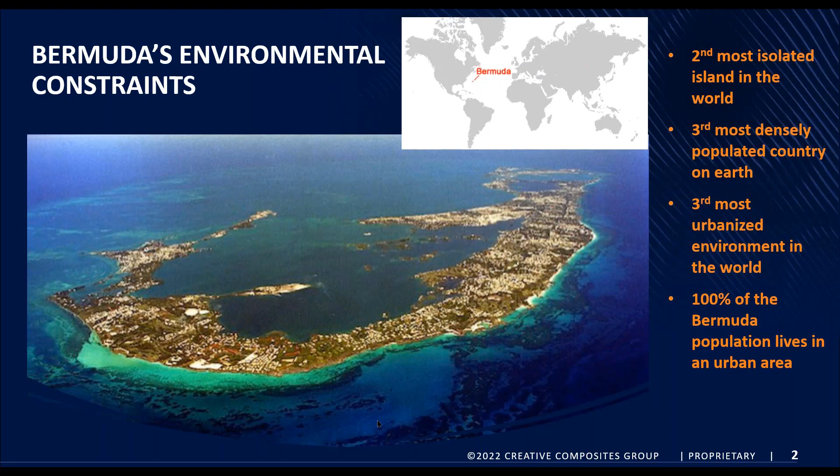We're also incredibly densely populated. We have about 60,000 people on our small island. And as a result, it's a very urban place. We're classified as almost 100% urban. We're living right on top of each other. Because we're so constrained by space, national parks are very important here, and our biggest national park and our longest linear park is an old railway trail.

We had a train that ran here for about 17 years, and the trail has been preserved into modern day. So back in 2012, I had come back to Bermuda from my university, and I decided to set up a charity called the Friends of Bermuda Railway Trail to attempt to enhance and reconnect this national park and turn it into a continuous route for pedestrians and cyclists.

But this project is associated with many challenges. In particular, we're one of the saltiest marine environments in the world. We're also hurricane prone, and the original rail line had 33 bridges and trestles. So we knew that anything we did to reconnect it would have to meet our tough environmental circumstances and be able to withstand hurricane force winds.

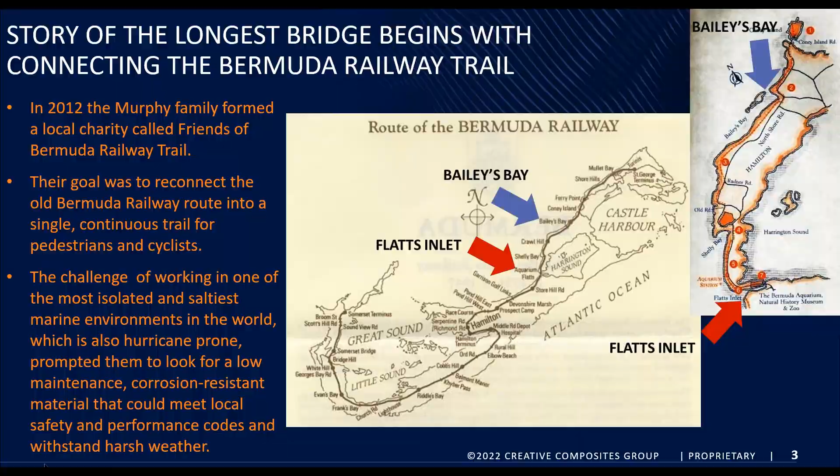And we talked to, at the time, a fellow called Eric Johansen, who was the founder of Techtonics and the lead engineer. And he introduced us to these fiberglass bridges, which had many advantages for us for this project. The pylons were pre-existing, and the bridges could be shipped in containers and assembled off-site in a location called Dockyard, and then barged into place. They were assembled by volunteers, myself included, and Parks Department employees.

So we constructed these bridges, and we found that we had great success in terms of trail use. The average trail use per week increased about tenfold, and it exposed locals and tourists alike to one of our greatest assets, which, aside from the friendly people, I'd say is the turquoise sea. That's really one of the highlights of our environment here.

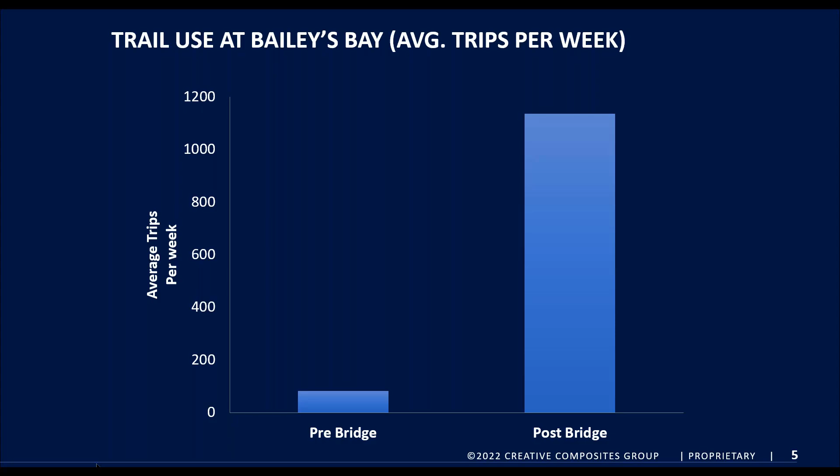But it didn't last very long. Our railway age came late and was kind of short-lived. It was finished in 1931 and only lasted until 1948. And part of the issue was that our harsh natural environment led to many maintenance problems. The towers which the trestles are built upon were made out of wood. They rotted quite quickly. I've been told that the ends weren't soaked in creosote, so that was a big problem.

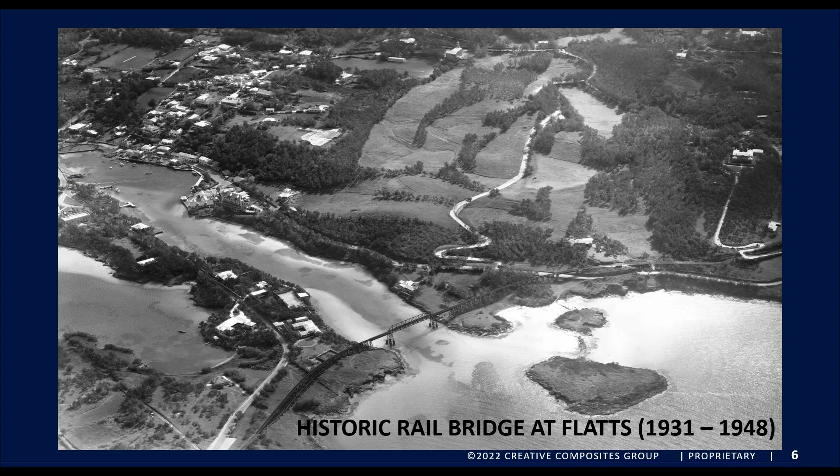And then also the tracks and the truss on top were constructed out of metal. They corroded and deteriorated very, very quickly until a point was reached where it wasn't worth the cost to try and continue the railway train, and it was reverted back to a national park.

Over to you, Dan. All right, thanks, Tucker, and that's a great introduction to this project. So we were tapped to do this. Sorry, I'll go back a slide.

Creative Composites Group, which Creative Pultrusions is part of, has the ET Techtonics product line, in which Eric Johansen, we call him Rick. Even in this project, Rick Johansen had oversight of the design with me of Creative Composites Group.

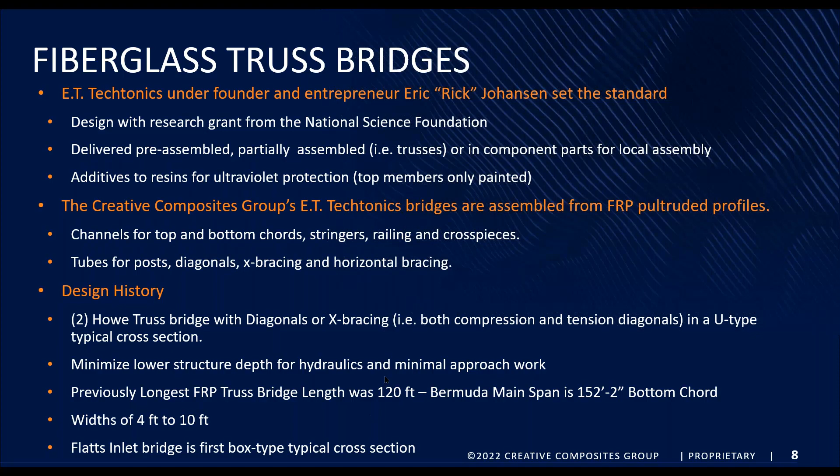As far as design and testing of the main span bridge, we designed this according to the Bermuda Building Code, which references the 2015 International Building Code, and ASCE 7-10, which is minimum loads for structures. And of course, this structure would be an other type of structure. We utilize the allowable stress design method.

This method is utilized mainly because AASHTO and the building code have not come out with LRFD phi factors or parameters for pultruded members. We are expecting the building code to publish these phi factors for LRFD design very soon.

So this project, a concern, and Bailey's Bay, all those bridges that you saw in the previous project, have withstood type 4 and type 5 hurricane winds. So the hurricane wind load was considered to be 158 miles per hour. That's our velocity, and the building code modifies that load by a factor for service load of 0.6. So the net design pressure on this structure is 67 pounds per square foot applied to the side of the structure as if enclosed.

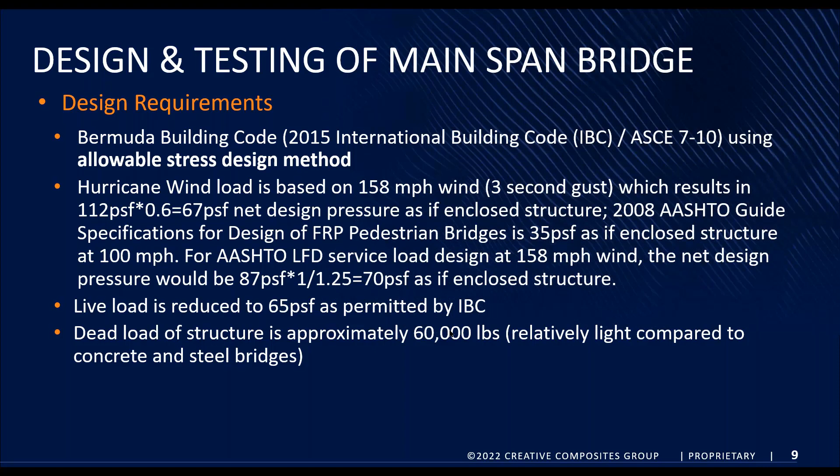The design process of this main span: first, Rick and I modeled the design, a finite element analysis of the box truss structure. And so we came up with some general loading. Then we went to the University of Miami and West Virginia University and had our members tested.

The photo on the side is a test of a 3-foot long tube member, and we're testing its compression capabilities. From that, we developed the Euler buckling graph of our compression members, and we also tested these members in tension, as well as those channels mentioned before.

And then finally, for connection design, many of you are interested in the connection design of these structures. Well, essentially, we don't calculate connection design like you do for a steel bridge. We take our material, set up an apparatus, test it, and validate those connections through bearing tests. And so we do our connection design based on actual tests.

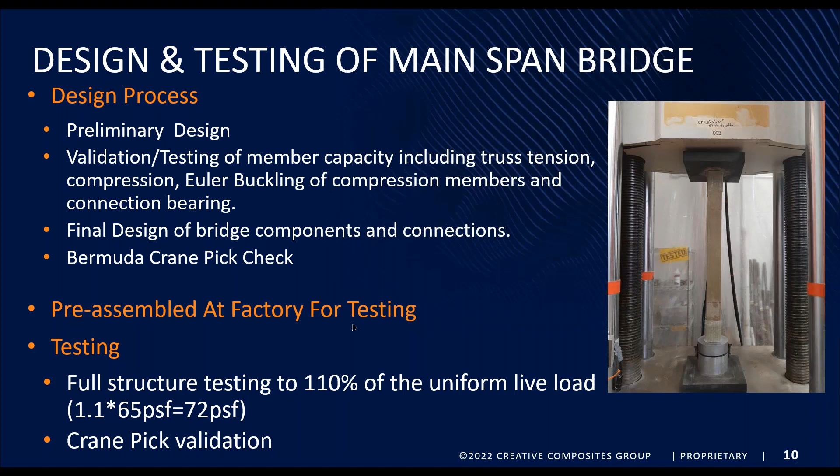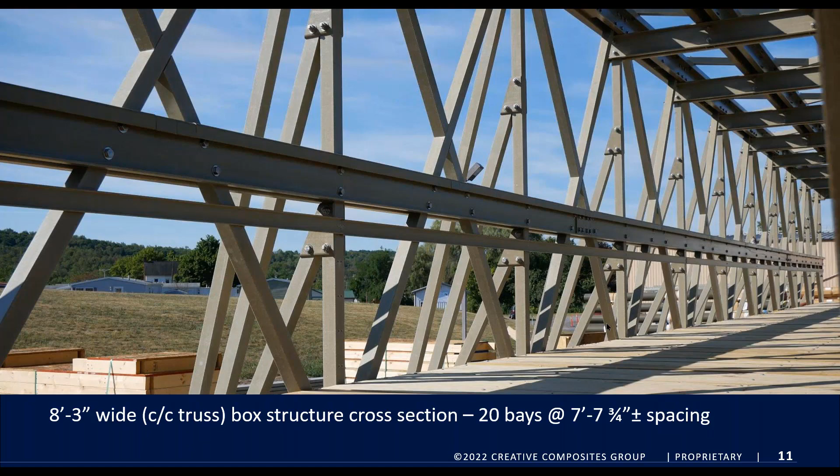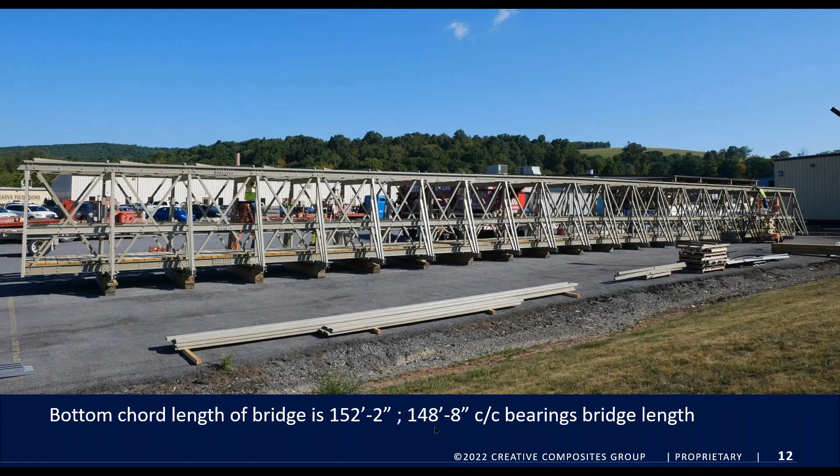There were 20 bays at approximately 7 foot, 7 3/4 inch spacing. As you can see in the yard, the bottom chord length was 152 foot 2 inches. The center line of bearings, and we're going to show you a picture of what the bearings look like here shortly, they were 148 foot 8 inches, center to center bearing bridge length. Some of the facets of design before we get into the construction of it and assembly.

Containers are limited to 40 feet when we are going to ship this bridge. So our maximum member, as you can see here, is 38 foot 3/4 inch. I have the wrong number in the slide there on the text, but that is part of the plans there. 152 foot 2 inch bottom chord shown. We used a 28 3/4 inch diameter A316 stainless steel bolt splice.

All bolts or hardware were A316 designation. The weight of that longest member in the middle, 38 feet, is approximately 226 pounds. So 2 people can take that member and move it into place. The compression members were checked at splice locations with top chord splices controlling the design. We located those splices as far as possible away within those limits of shipping containers.

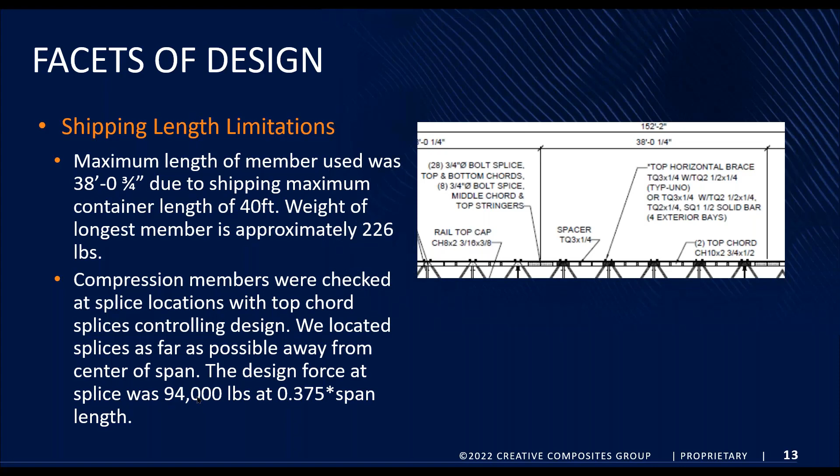Just for a quantitative number, the design force at the splice was 94,000 pounds at about 0.375 times the span length. The allowable value was around 135,000 pounds at this splice location. Another facet of design, because FRP is lightweight, we must check frequencies. The 2008 AASHTO guide specifications for design of FRP pedestrian bridges require vertical frequency of 5 hertz and transverse frequency of 3 hertz minimum for negligible risk of vibrational issues.

Essentially, the vibrational issues can cause troubles. When you have synchronized pedestrian use of a bridge, that synchronized dynamic force can cause vibration, which results in deflection of the structure. And if that is continued, it will accelerate and essentially make the bridge fail.

Actual frequencies, and we mostly model our bridges without decking, knowing that that decking will help with diaphragm action, especially in the lateral or transverse direction, were 2.88 hertz in the vertical direction and 2.587 hertz in the transverse direction of the bridge. That may look a little alarming, so let me explain with the next slide.

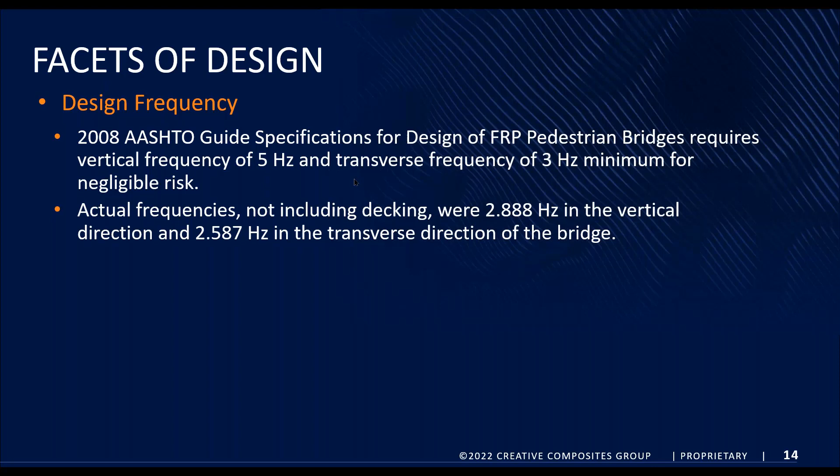As referenced in the current AASHTO pedestrian design specifications, there is a document that's referenced from Europe. In fact, it's part of the France Association of Civil Engineering. It's called the 2006 Setra document, and that's referenced in the last slide also. We looked at this after we designed the bridge, and we went through an analysis as required by that method. Essentially, it looks at acceleration of the bridge during synchronized pedestrian motion.

Now, if you remember, those numbers that I gave you before were based on natural frequency in hertz. So this is a better indicator of what kind of comfort you're going to have. So we went through this, and I'm going to show you this graph a little bit. We looked at it in both directions. So this is part of that Setra document. Again, if it meets the AASHTO requirements, then we are negligible risk.

As you can see here in each direction of the bridge, looking at the acceleration, we ended up with a low risk of vibrational troubles. And then it's categorized as maximum comfort, mean comfort, or minimum comfort. And obviously the red range is look out. That's high risk, okay? So if we looked at this acceleration, which is way below, we're right in here near 0. So we're at maximum comfort level.

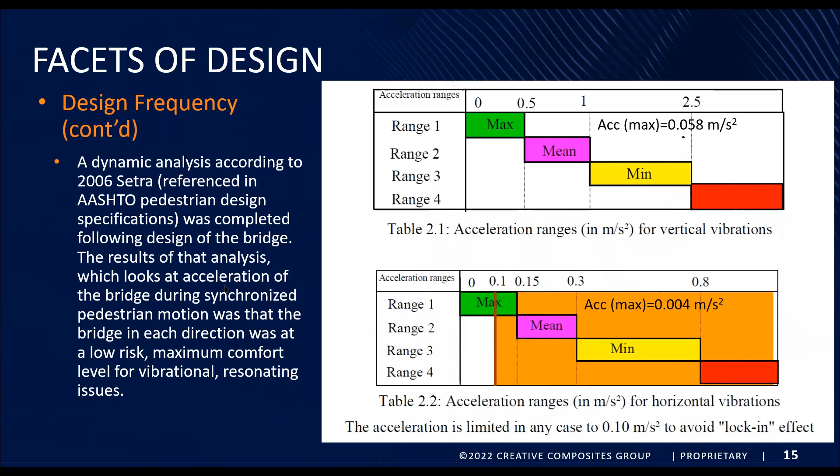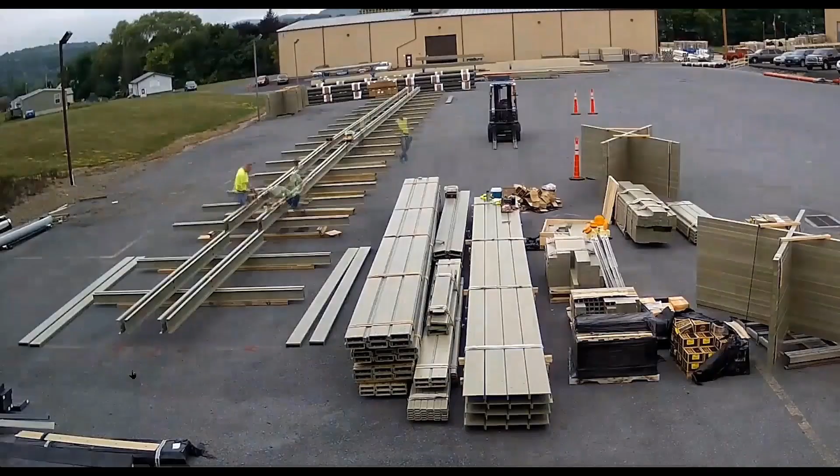Now we're going to show you an assembly. That was some of the facets of design. We'll continue to talk about another facet of design with the assembly and testing. So I just want to show you a video here. We assembled this in our yard. You saw some pictures already. We're going to show here, give you a minute. We're going to assemble it from the bottom to the top. You'll see things under each bay.

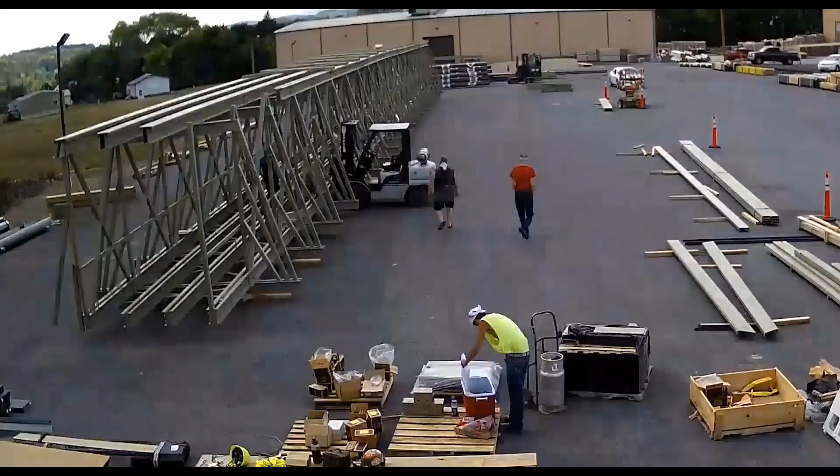We pre-camber our structures upward, just like a pre-stressed concrete bridge is pre-cambered upward with the stress in their pre-stressing strands. We pre-camber our bridges, and we have a technique to do that, a geometrical technique, placing the holes of our cross bracing. Another critical factor, we wanted to match the lift that was going to happen in Bermuda, and we wanted to make sure there were no problems.

Here is our lift, approximately 20 feet in the air, which was the required lift. Our crane is from a local crane company that lifts manufactured homes. Well, this was probably the longest manufactured home they ever lifted. So this was critical logistics. Bermuda was limited by the cranes, as I said before, and as part of the test program, we lifted this bridge and simulated the Bermuda pick in our yard.

There are 8 pick points, and maybe I can show you them quickly. As you can see, there's a line, there's a pick point. If you see blue on the structure, there's a pick point, pick point, pick. This was just a stability point that we added. So really we have 1, 2, 3, 4. So we have 8 pick points, 4 on each side.

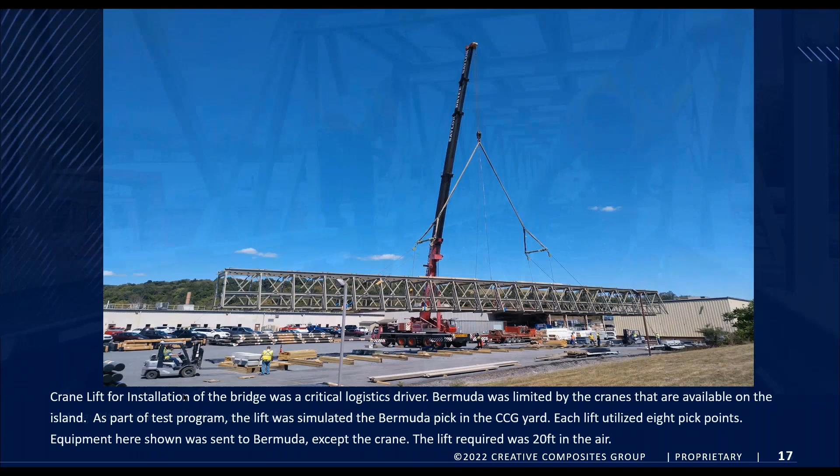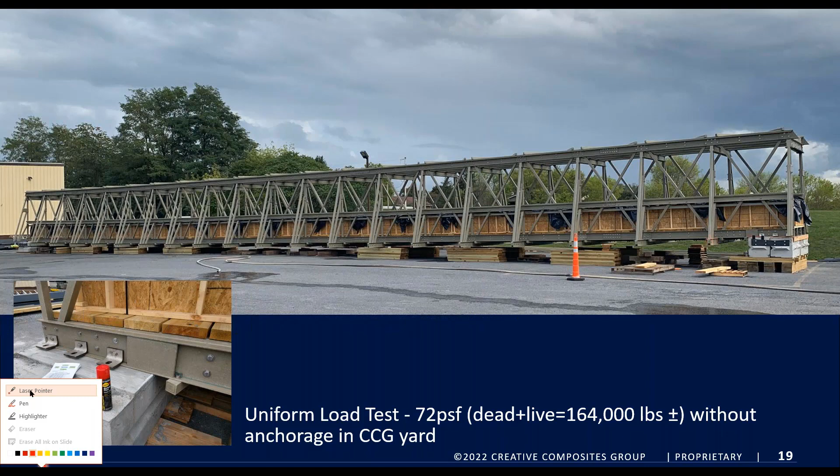We took the deflection. Deflection is a big deal for FRP members because often it controls the design. Not so much in this structure because it's a box structure. The section really helped us. But if you have a U-type structure, deflection will control. And we want our model to correlate with the deflections that we had.

So we measured deflections. We found about 5 inches. The model showed around 7 inches total with dead and live load. But we believe that to be okay because our model does not consider the rigidity of the decking. So this 5 inches, which was a little lower than 7 inches, we were quite pleased with that when we did the testing of the dead plus live.

Moving on to installation. The bridge was disassembled. It was kitted or packaged up and shipped to Bermuda in containers. Tucker, who is going to continue, reassembled the job. We couldn't go to Bermuda because of the pandemic. We were not allowed to be on the island. It was closed. And so we shipped the bridge to Bermuda for Tucker to assemble and install.

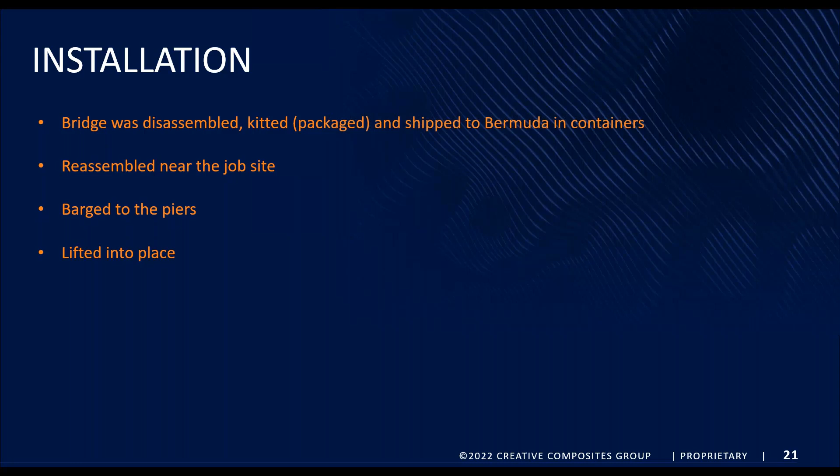He then assembled it, which you will see. He barged it to the piers and then lifted it into place. Tucker? Thank you, Dan. That was a very informative piece on the design and some of the technical issues of the bridge. I'm just going to talk a little bit about putting the bridge together on site and how we got it to our final location.

And as Dan mentioned, I had the good fortune to build this bridge twice and disassemble it once. So I traveled to Pennsylvania during the height of the pandemic in August of 2020, and then I came back and the bridges arrived in October 2020. They were shipped in 3 containers, and our staging location was at the western end of Bermuda, a place called Dockyard, which was home to America's Cup in 2017.

And it was really an ideal area for us in many ways because it's pretty wide open, an easy area to work. One of the challenges was we had to be near enough to the water to have the barge pull up and be able to pick the bridge, which left us quite exposed to the conditions. So any storm that came through, we really felt. But the bridge, once it arrived in Bermuda, was constructed entirely by a team of volunteers, and we had one telehandler, or a forklift could also work.

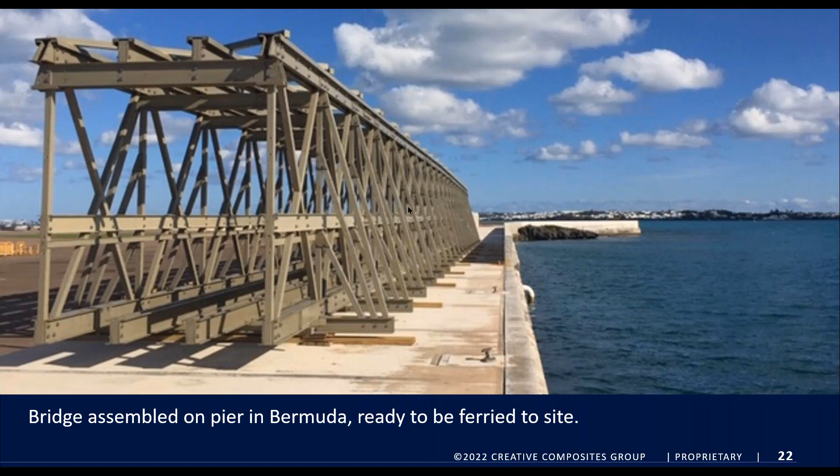The volunteers were an eclectic group of people. It was a mix of young and old, women and men. I think our oldest volunteer was 80 years old. And we even had a fellow who had been stranded in Bermuda on his boat during the pandemic in Dockyard, and he had nothing to do, so he just came out and helped us put the bridge together. So almost anyone can do it. And as Dan mentioned, it's very lightweight, so it only took 2 or 3 people to carry each piece of the bridge. Once we assembled it, we picked it up, put it on this barge.

As you can see, the barge, that was probably the most stressful part. I think we were pressed by time to get everything done in time to get it on the barge. And we were fortunate that we had done the lift before in Pennsylvania. We knew exactly what the equipment was. The only factor we couldn't control is we hadn't put it on a barge before, and that was the most stressful thing, I think, watching the bridge leave the dock on the barge.

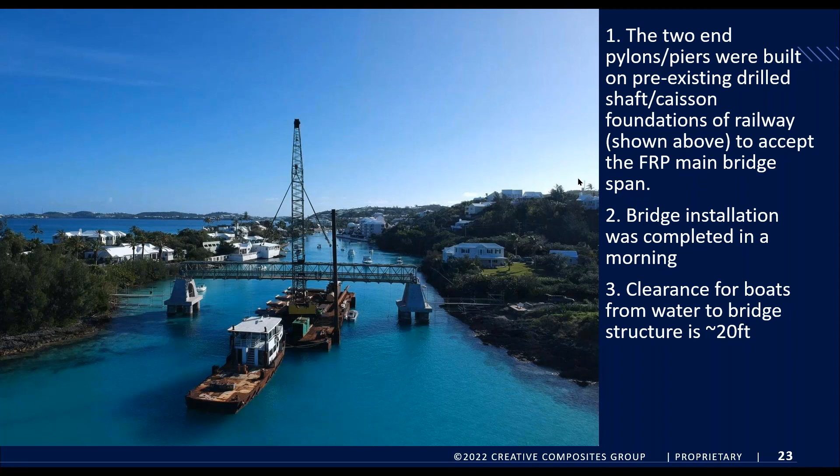You just hope that it would not be lost at sea and become a bridge for fishes instead of people. But we had a calm day, so everything arrived okay on site. And the installation went very smoothly. Our anchor bolts aligned perfectly, and the installation itself actually only took a morning. And here you can see the bridge in place. It's got about a 20-foot clearance for boats underneath.

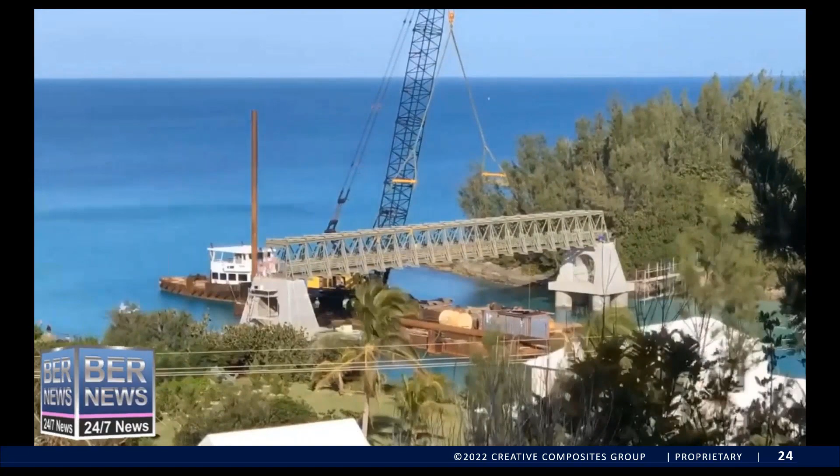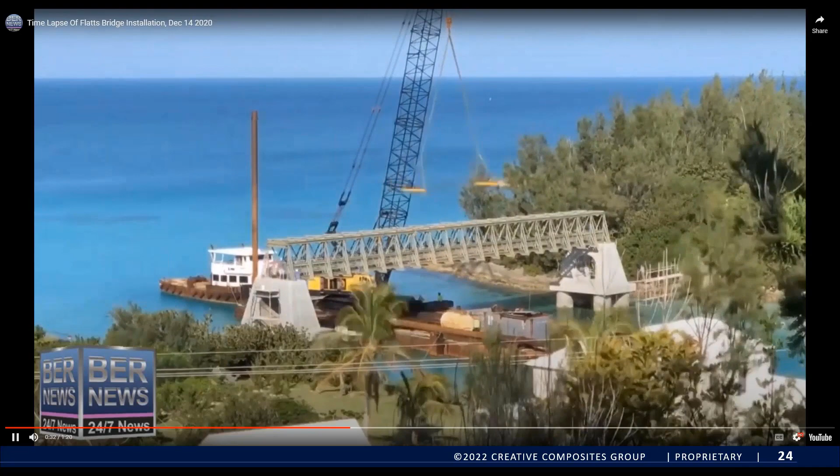So here's just a short video of the installation. Dan's going to start it. It's sped up slightly, but it really is quick. So we just lined the barge up, anchored it. On the pylons, we had the contractor who built the pylons, and then the barge was obviously contracted out as well. Yeah, Tucker, that was installed, as the video says, on December 14th, 2020. Yep.

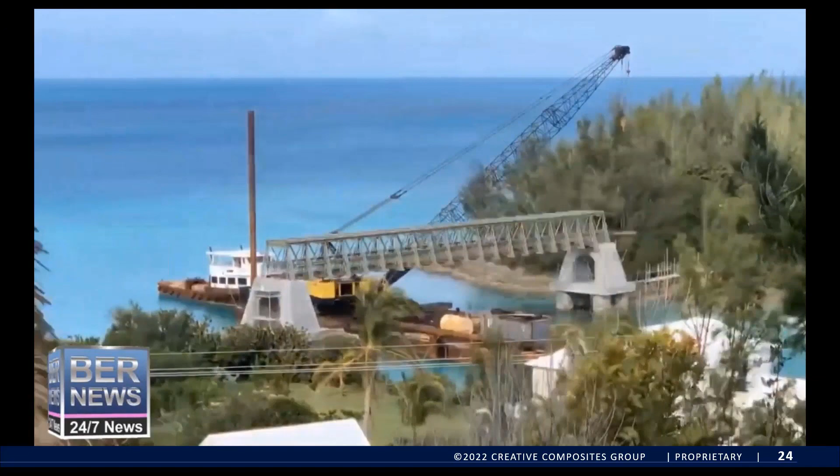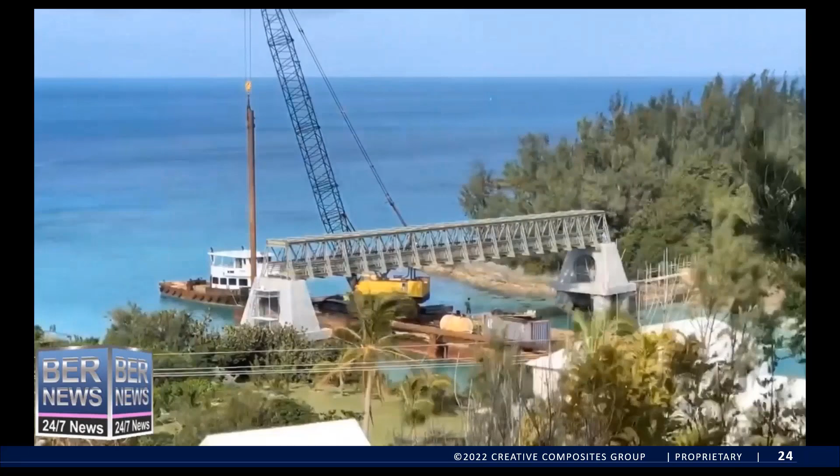And it was a big event in Bermuda; the local news station, this is where the video is coming from, they were there to capture it. So we were fortunate that everything went smoothly. And actually, we also had a video link with Creative Pultrusions. They could not be there at the time because of the pandemic; restrictions were quite severe at the time. So they were watching remotely and guiding us on any questions we had.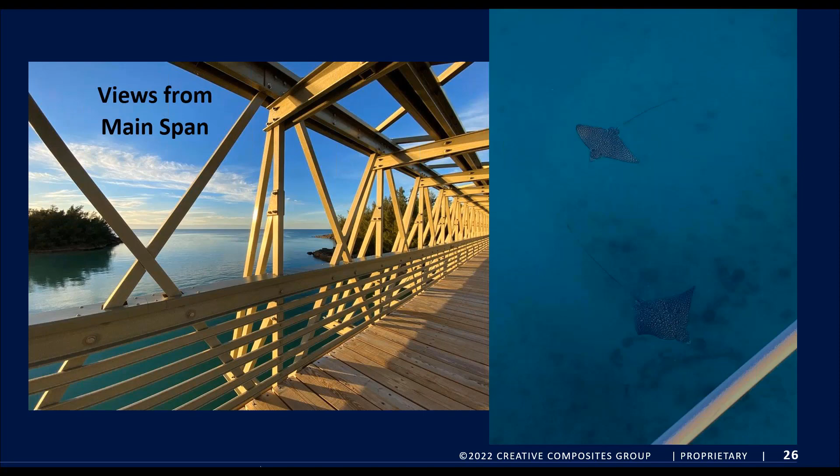I just wanted to go over a little bit of the lessons learned. Again, we assembled it in our yard and it wasn't level. We used these concrete barriers that have pointed edges on them, as you can see. And when we started doing the test, one of the corners, the knife of that barrier, started coming into our material. And because of the higher stresses there at that point, it started propagating a crack in our bottom chord.

So we went back and decided to firm that up, as you can see here, and we firmed that area up. The design numbers were okay in this area. It's just that localized hinge point, or a jackknifing point, you might say, caused some troubles. And so we decided to reinforce that a little better and take care of that problem. And the testing that you saw earlier, the photos before, had that in effect. So we took care of all that.

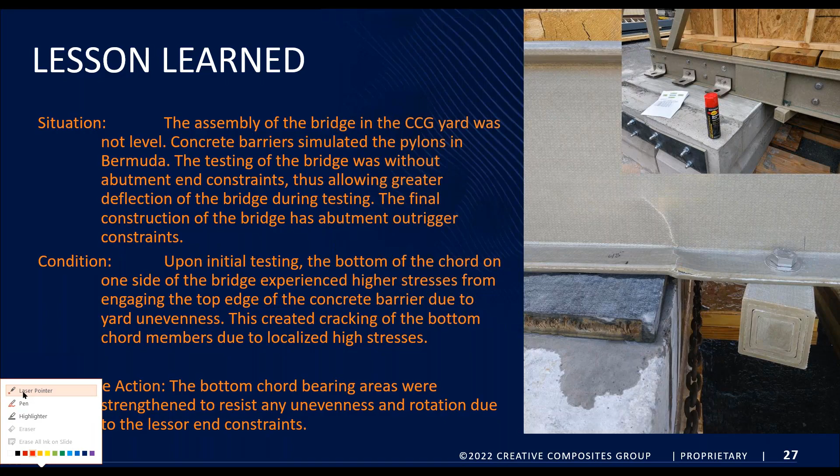All right, Dan and Tucker, thanks a lot. Very interesting presentation. In fact, very interesting concept for a very lightweight bridge. So at this point, we're gonna turn it to Paul Lyles, who's gonna be moderating the question and answer. Paul? Okay, thank you. And Tucker and Dan, real good job.

Okay, we had some questions that came in beforehand, and we've got some more that have come in during the presentation. We'll probably get some more during the question and answers. But I've broken the questions down into design questions, construction questions, maybe a couple maintenance questions, and some cost questions. And with that, we'll go ahead and get underway. The first one, design questions. Could you discuss climate change and resiliency in respect to the project?

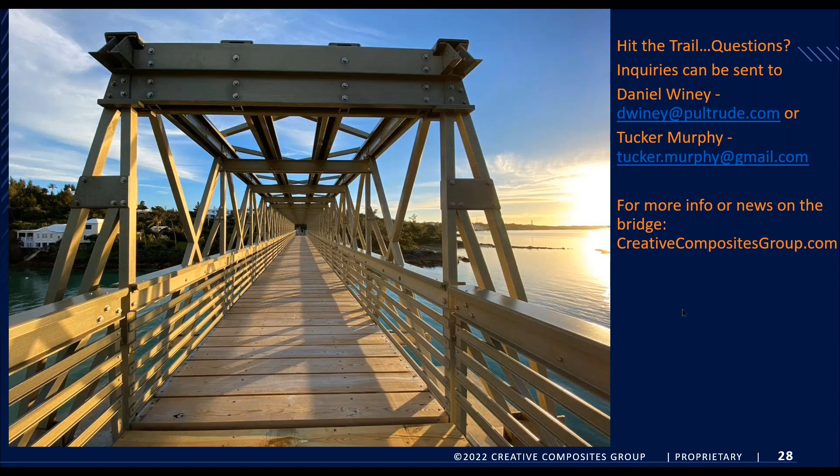Yeah, you do take their equations, whether the cosine or the sine, and you incorporate that in. So whoever asked that question could maybe get further clarification. But yeah, you can do that. That's in that document, how you calculate that.

Okay. What is the thermal coefficient of expansion for FRP compared to steel or concrete? It's less. Very similar to concrete, definitely less than steel. And it's in our manual. So if you go to the Pultex manual under the references, you can see it in there for our members, channels and whatnot. Okay, thank you. Next question, was uplift a concern in the design of the connections for the bridge?

Yes, we sent all that data to the engineer in Bermuda. So we coordinated all that and gave them reactions. Okay, thank you. Next question, what collision protection have you provided? Not really any, besides what was structural to the project. Yeah, in terms of the inlet itself, there's not really any. There are not really any boats. It's not like the Intracoastal Waterway or something which goes somewhere. It's mainly small center console watercraft that go under the bridge, and the biggest boats belong to the local aquarium, and they're very aware of it.